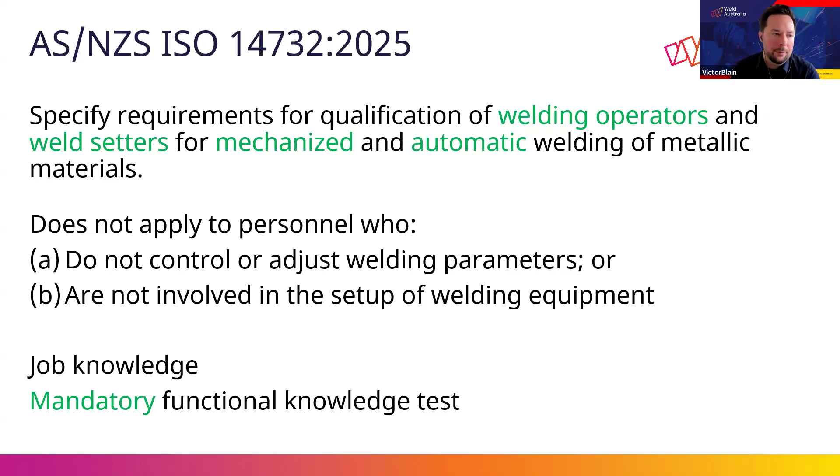So starting with those definitions, what is mechanized welding? It's welding where the required welding parameters are maintained by mechanical or electronic means, but manual adjustment of welding parameters by the welding operator during welding is possible.

Then automatic welding is welding in which all operations are performed without welding operator intervention during the process. In this case, manual adjustment of welding variables by the welding operator during welding is not possible. So looking at a few examples to better understand this.

In terms of mechanized welding, it would be these processes where you can change, potentially adjusting the travel speed, the torch angle or positioning during welding, or the welding parameter. So for example, if you use GMAW solid wire and it's tractor mounted, that would be mechanized, because as the welding is progressing, you may adjust the positioning of the electrode, potentially even the travel speed or some parameters.

Submerged arc welding, in most instances, is a mechanized process in the same way. Orbital TIG as well, when you can also adjust some parameters during welding. Resistance spot welding, especially when the operator manipulates the electrode location, is a mechanized welding process.

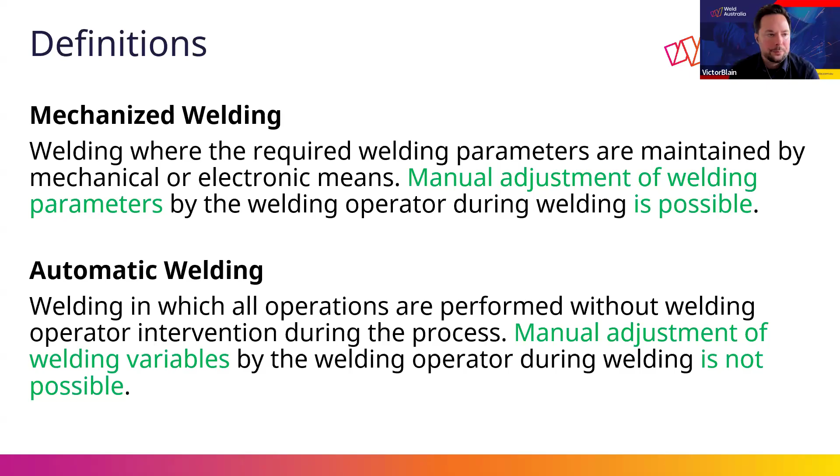Then still in the definitions, what's a welding operator? What's a weld setter? That's very important as well to understand the scope of who needs to be qualified. A welding operator is a person who controls or adjusts any welding parameters for mechanized welding or automatic welding. And a weld setter is a person who sets up the welding unit for mechanized welding or automatic welding.

So for example, when I mentioned mechanized orbital TIG and the operator can change the setting during welding, then that would require a welding operator qualification. But for the orbital TIG process, if it's all pre-programmed, a pre-programmed cycle from start to finish with no manual adjustment, then that would be a weld setter qualification.

Basically, if the person is starting the process, monitoring the process, and can intervene as required, typically that will be your welding operator. That person is responsible for the outcome of the process. Whereas the weld setter is the person that would only program or set up the machine before production, not having any control or monitoring during welding.

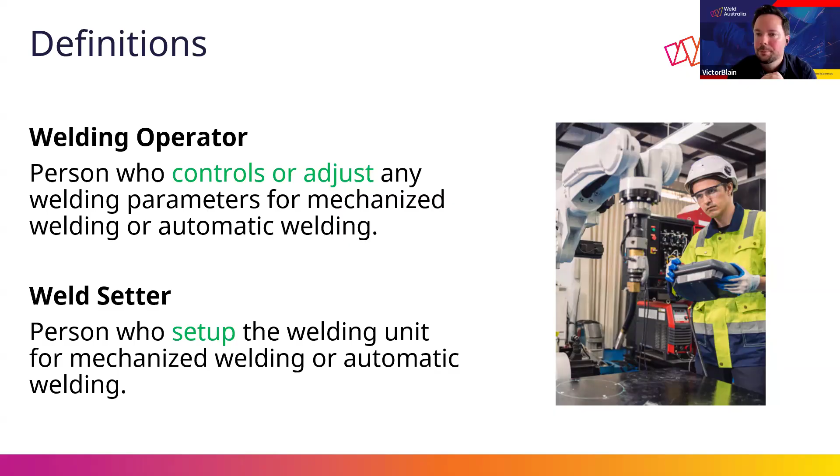We'll get to the testing and extent of testing and discuss that a little bit more as well. But the short answer is yes, that person would also need to have a weld setter qualification if that's part of what they do. Okay.

Now we're going into the section about qualification, diving a little bit more into how we run this qualification. So similar to manual welding, it's required to follow a work instruction based on, or following directly, a preliminary welding procedure or a welding procedure in accordance with ISO 15609. So noting here that it is acceptable to use a preliminary welding procedure.

So you don't necessarily need to qualify the welding procedure that you want to follow for your welding operator qualifications, but you need to have that document so that there is a clear instruction of what is required to be done, and for the welding operator or the person undergoing the qualification to have all the necessary information.

And here we're looking at an ISO standard, so that's why it's referencing the ISO standard associated with the writing of welding procedures. ISO 15609 has a few parts depending on the welding process: Part 1 for arc welding, Part 2 for gas welding, Part 3 electron beam welding, and Part 4 for laser beam welding. And I didn't mention it as an example, but this will also cover stud welding. Stud welding has its own ISO standard as well, ISO 14555.

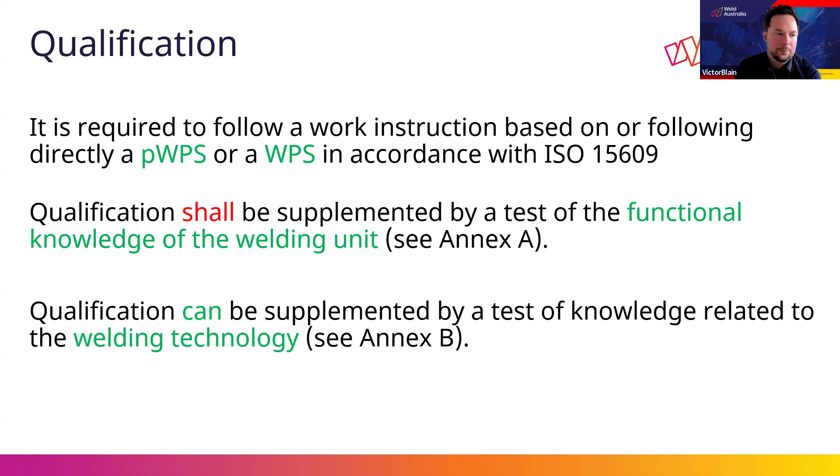So for the qualification, the welding operator or weld setter who performed the welding procedure qualification test is also qualified in accordance with ISO 14732. So what that means is the person who welded the WPQR, you can use that same test to meet the standard of ISO 14732.

Again, you need to be careful that you still need to meet all the requirements and have that functional knowledge of the welding unit test and still issue a welding operator or weld setter qualification certificate. But that's one way in terms of the welding of a test piece and the extent of testing. That's an acceptable way of qualifying that person.

Then in terms of what is required for testing acceptance criteria, it will be different depending on the welding process. As you can imagine, the acceptance criteria for resistance welding versus arc welding would be very different. So it's broken into a few sections. To start with, we have fusion welding, which would be the most common welding processes, in accordance with ISO 9606 corresponding part. So basically the qualification testing and acceptance criteria can be on a test piece in accordance with ISO 9606.

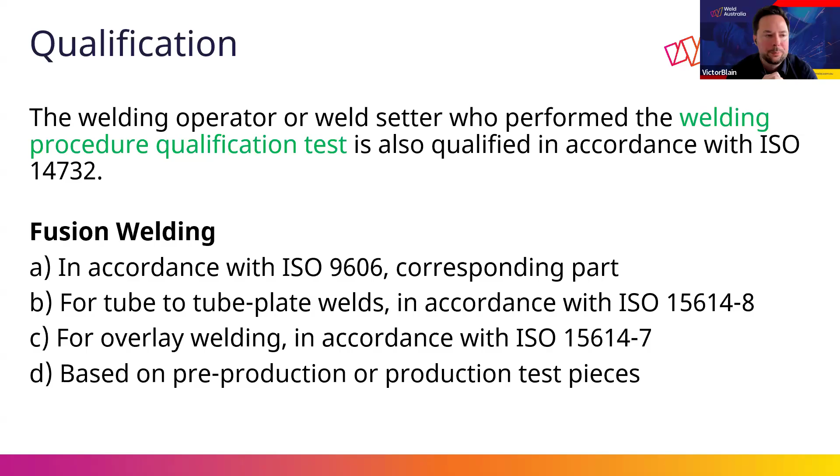Then the qualification for the other processes as well, resistance welding, arc welding, stud welding, laser beam welding, electron beam welding, it all sends you back to the standard of qualifying welding procedure for those processes. But then the extent of testing is streamlined a little bit.

So resistance welding here, the test piece in accordance with ISO 15614 part 12 and 13. Part 12 is the qualification of procedure for spot, seam, and projection welding. In that case, typically you would do visual testing and shear test. Part 13 is for resistance butt and flash welding. So typically you would do a visual testing and bend test.

And ISO 15613 is the pre-production test I already mentioned. And basically here with resistance welding, you could decide to do a visual testing and macro examination on the pre-production test as well.

Then arc stud welding in accordance with ISO 14555. The ISO 14555 standard already has its own requirement for qualifying stud welding operators. But within those requirements, it actually mandates ISO 14732. So it sends you to this standard as well. And in that case, typically you weld 10 studs. You do the visual, and then you do the bend test where you do the 60 degrees bend on the studs.

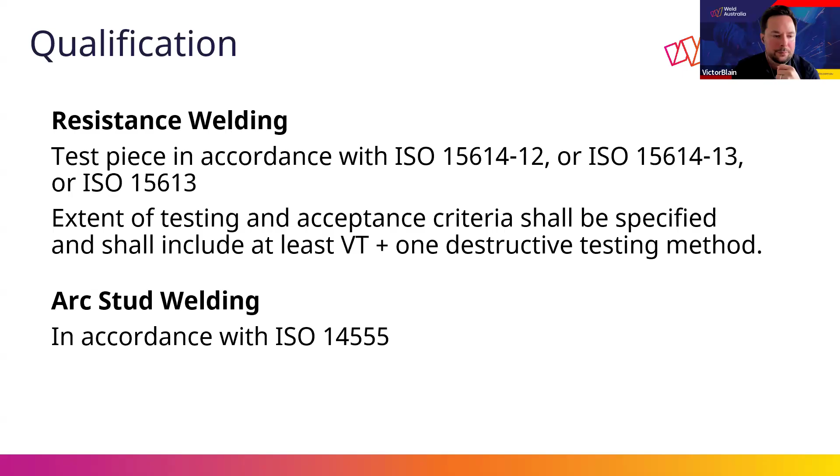So you see that basically it sends you back to the test piece of qualifying a welding procedure in most instances, but streamlines the extent of testing. Now, with these qualifications, similar to manual welding, once qualified, it gives a range of application, a range of welding that this person is now qualified to do. This is where there's the biggest difference between the requirements of this standard versus manual welding. Basically, the range is much wider.

When it comes to manual welding, the material grouping will limit what a person can be qualified for. The type of weld, is it a butt weld or a fillet weld? The deposited thickness, the outside pipe diameter. There's a lot of essential variables for manual welding where, for the skills, the dexterity of the welder, the welder will need a different skill. Whereas when it comes to mechanized or automatic welding, it's more about the usage of the welding unit than really what the welding unit is doing. And that's why this range is much, much wider for a welding operator or a weld setter.

And that's where there's the main benefit of using this standard, because if you qualify a welding operator following the range of manual welding, you may need them to do a whole range of different qualifications, where actually they may have needed only one qualification as a welding operator with that welding unit. For example, you may weld steel, and then may weld stainless steel, even aluminium. That person won't need separate qualifications for all the separate material groupings, which can save you a lot of money and a lot of time when it comes to personnel qualification for welding.

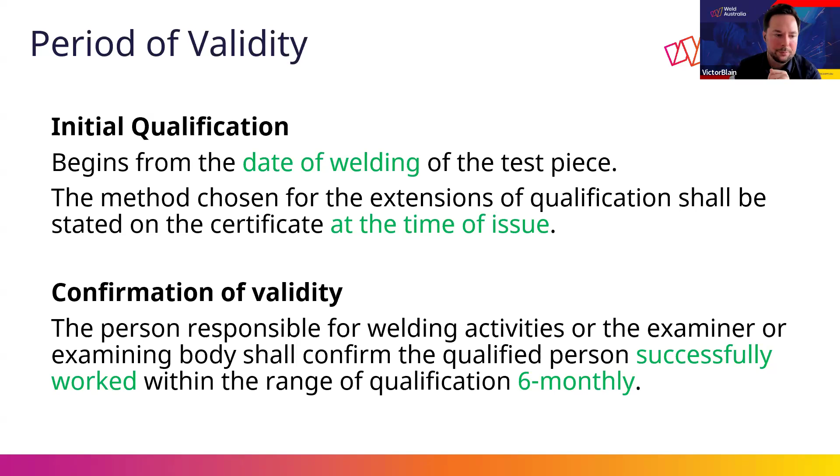Then every 6 months, you do that confirmation. But then you need to also revalidate at one point. Here, you have 3 options. The first option is to requalify, basically you redo the same qualification 6 years later. So compared to manual welding here, instead of 3 years, it's 6 years. So you see that it's a longer validity period.

Option B is every 3 years, 2 production welds made during the last 6 months of the validity period shall be tested by volumetric NDT or destructive testing. So here, typically, if you don't do those volumetric NDT as part of your production requirements, you go with option A. But if you already do those volumetric tests, you just use those to do the revalidation as per option B.

And here there's option C, where the qualification can remain valid as long as the qualified person works for the same manufacturer, the manufacturer's ISO 3834 quality requirements are proven by verification, and there is documented evidence of the production of acceptable welds based on application standards.